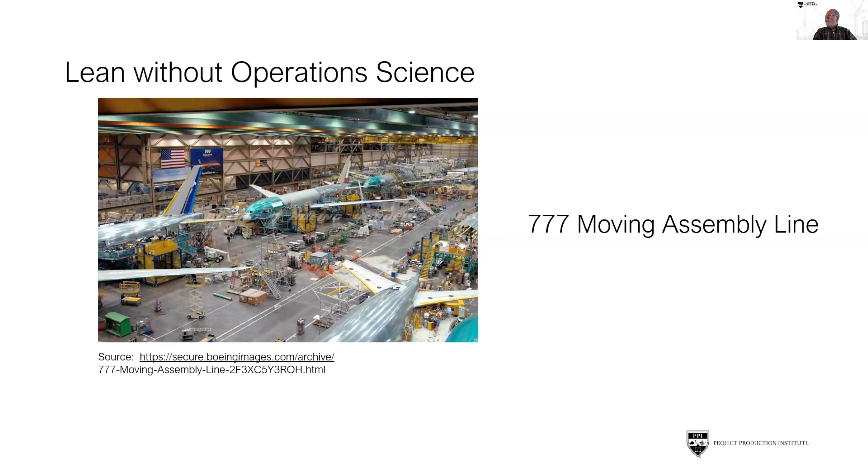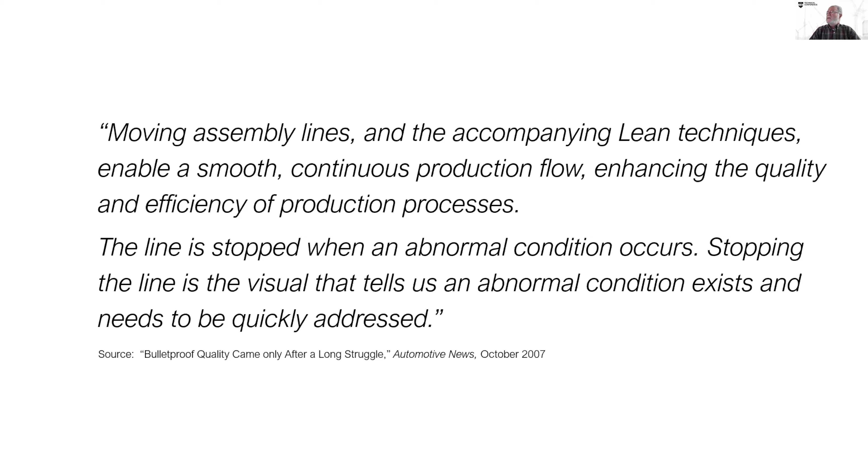Almost 15 years ago, I saw a talk about the 777 moving assembly line, presented by a guy from Boeing. That got us very interested. The reason you have moving assembly lines is that when the line is stopped, there's some abnormal condition. Stopping the line is a visual signal that tells you something is going on and you need to address it quickly. The only problem with the Boeing moving assembly line is it moved inches per hour, not very fast, so no one really noticed, but that was okay. They still wanted to implement a moving assembly line because that's what their Japanese lean consultants told them they needed to do. So they did it. In 2006, 2007, they spent $250 million on changes to the plant.

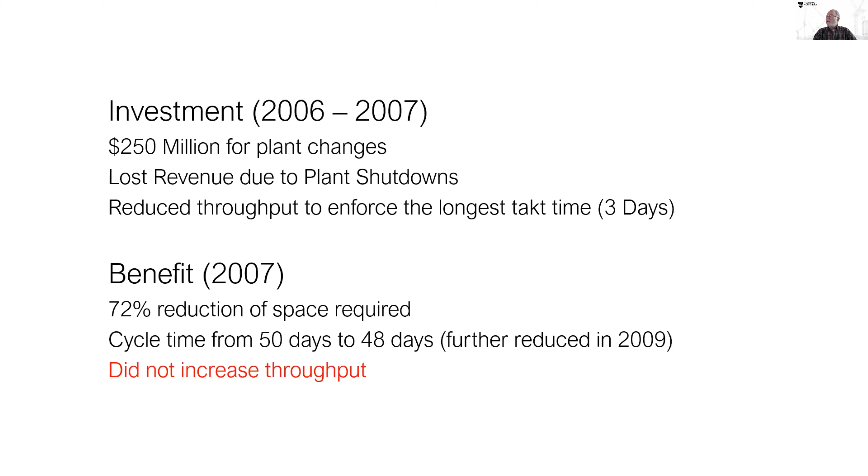They lost revenue due to the plant shutdowns, and they reduced throughput to enforce the longest takt time, because not all planes are the same. The more complex planes, especially the ones with fancier seats, take longer. So their takt time was 3 days, one plane every 3 days, and that's what it started out with. By 2007, they reduced space by 72%. They reduced cycle time slightly, then reduced it further, but they did not change the takt time, so they didn't really increase throughput. And throughput was the real issue, because customers of 777s aren't placing their orders 2 weeks before they need it, they place it years before. So if the backlog has grown too long, they may not place the order with Boeing—they may go somewhere else, maybe France, for instance.

So more recently, by 2020, 2022, the 777 was no longer built on a moving assembly line, but had a stationary assembly. The question is, they did get some improvement after implementing the moving assembly line—decreased takt time, increased throughput—but it had nothing to do with the moving assembly line itself. It was pre-wiring of harnesses and developing new technology for drilling holes in fuselages that really drove it, and that had nothing to do with the moving assembly line. So the point is, copying another company, which is different from you, may not be the best way to implement lean. And of course, we think the best way to implement lean is to use operations science.

So we're going to talk about how lean works, first according to the lean gurus: Muda, Mura, and Muri—3 Japanese words that start with M. Muda is any activity that consumes resources but doesn't provide value to the customer. It's also known as waste. And there are all kinds of muda.

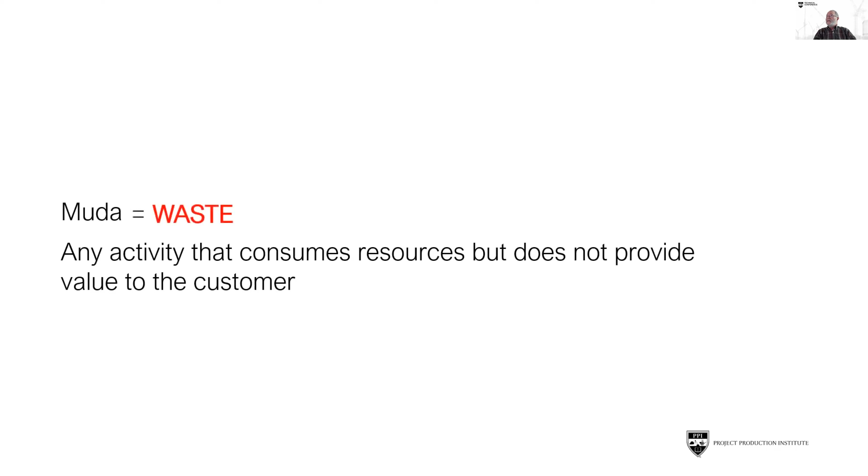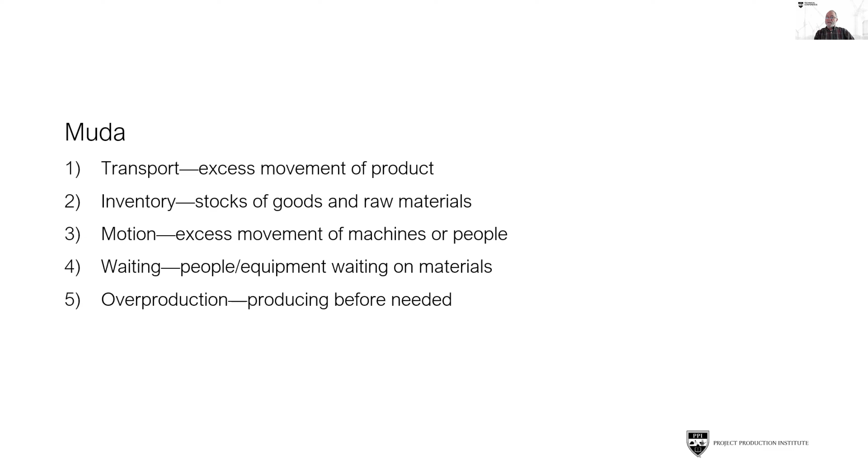There's transport, any excess movement of the product that isn't required by the customer; inventory, any stocks of goods or raw materials; any excess motion of machines, people, or equipment; waiting on materials; overproduction, producing before it's needed; overprocessing, doing more than customer expectations; and defects.

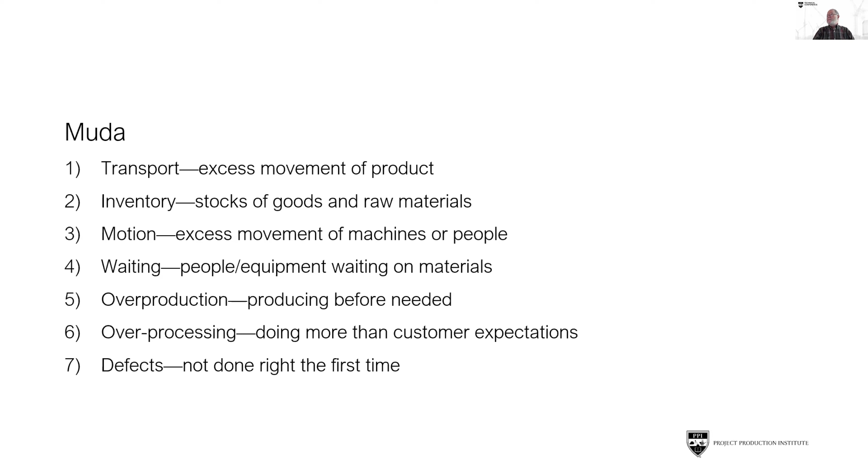Now, these are the 7 forms of muda as put forward by Taiichi Ohno in his book, The Toyota Production System. Since then, other people have added more, 8, and I think Boeing had 10, but we're going to use the 7 that Ohno created. And here's a picture of transport, inventory, motion, overproduction.

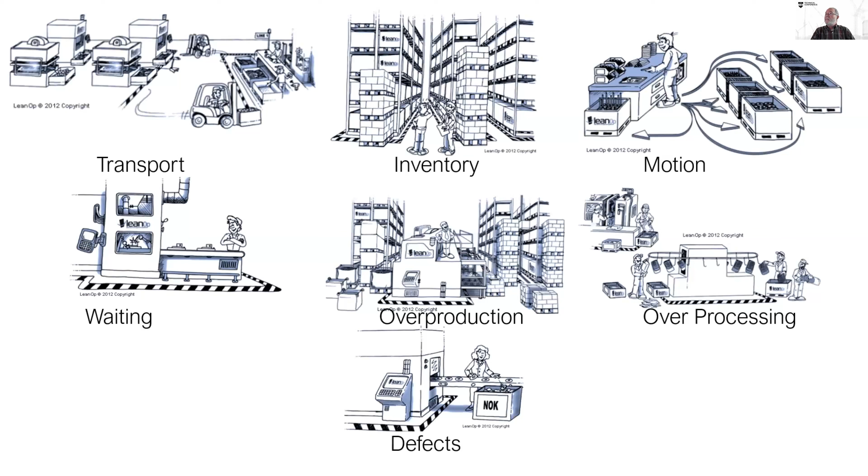Mura is unevenness in an operation, irregularity or non-uniformity. Mura is the reason for the existence of the 7 wastes. It drives and leads to the muda.

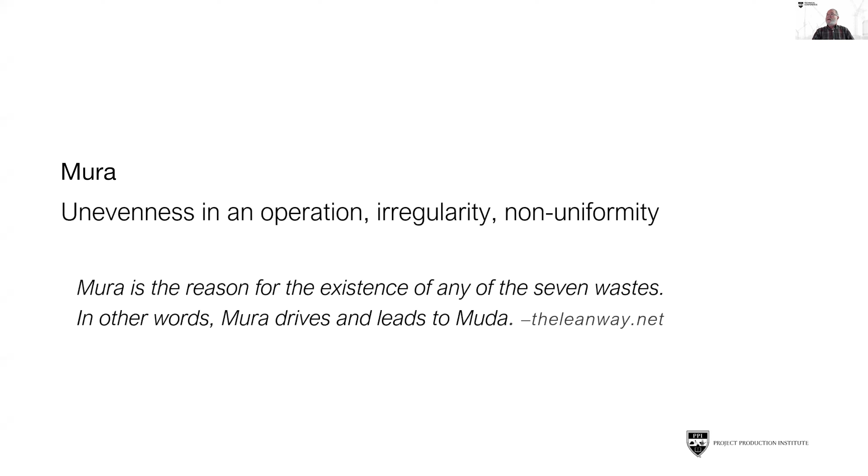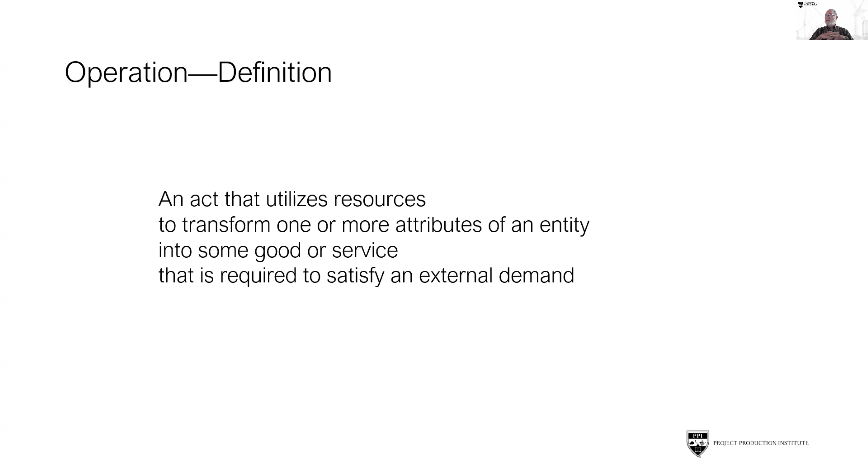And then we're going to go through a quick review of operation science. So first, what is an operation? An operation is an act that utilizes resources to transform one or more attributes of an entity into some good or service that satisfies some external demand. So the key thing is it requires resources, there's some kind of transformation, and there's some kind of demand. And so those 3 things become critical in understanding how basic operations work: resources, transformation, and demand.

So demand is the desire of some 'customer' for an entity or set of entities with particular attributes. So the customer could be individuals outside the organization, or it could be the machine downstream.

So it can be physical, the entities can be physical entities like in production, or it can be information or services. This operation science works for both manufacturing, for projects, and for services. So it's just as applicable in hotels and hospitals as it is in a manufacturing plant.

So demand is always satisfied by some process, and a process is usually one or more resources performing the transformation.

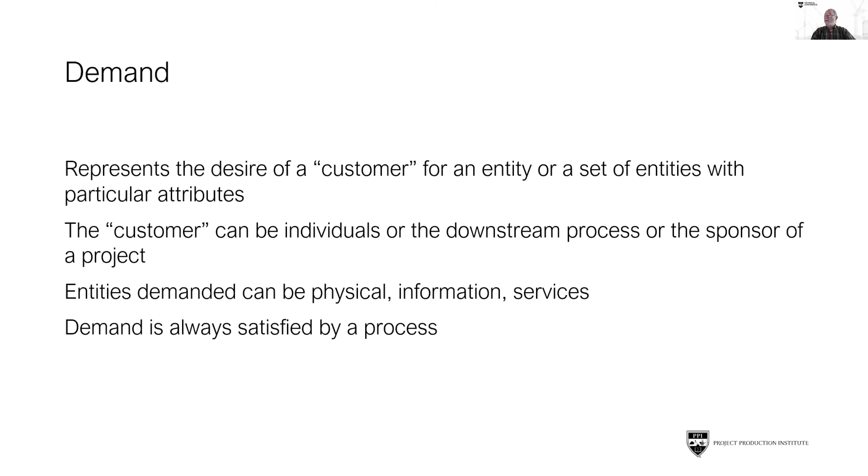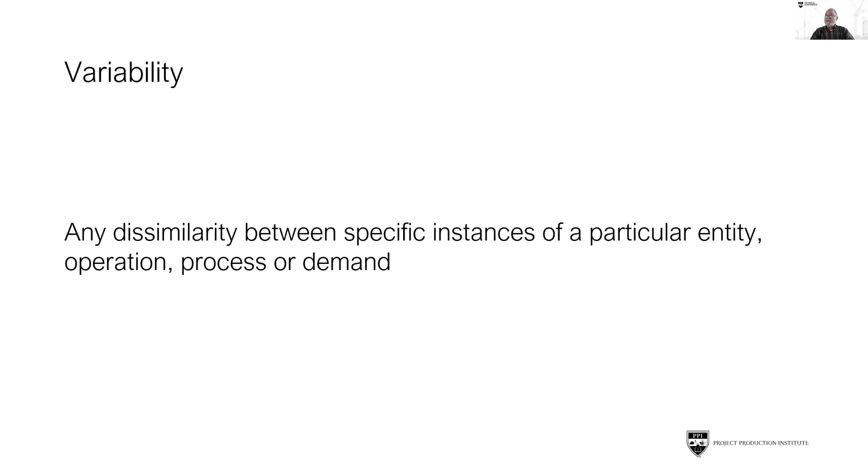Variability is a key big thing, and some other speakers have already talked about it. Any dissimilarity between specific instances of a particular entity, the operation, process, or demand. So you can have variability in demand, you can have variability in the process, you can have variability in the entities. We're going to mostly talk about variability in demand and time variability in the processes.

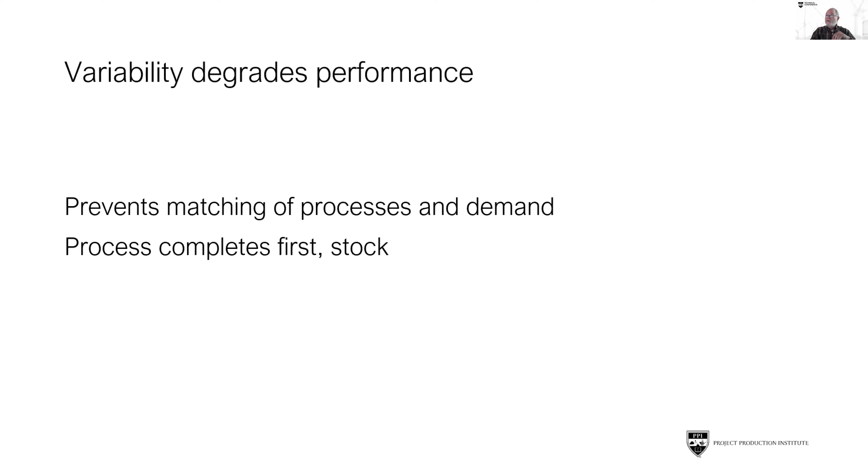Variability always degrades performance. This was one of the laws of factory physics. It prevents the matching of the processes and demand. So you can think of transformation and demand, or processes and demand, as never perfectly matching up. If the process completes first, you have stock. If the demand occurs first, you have a back order or lost demand.

So for a service system, the demand always comes first because you don't know what the service is going to be. An ambulance can't say, well, we've already met that, we've already done that emergency, and we stocked it, and here it is off the shelf. You can't stock a service, so it's always back ordered. And then sometimes, not in the services case obviously, but for production, if you don't have it in stock, it could be lost demand.

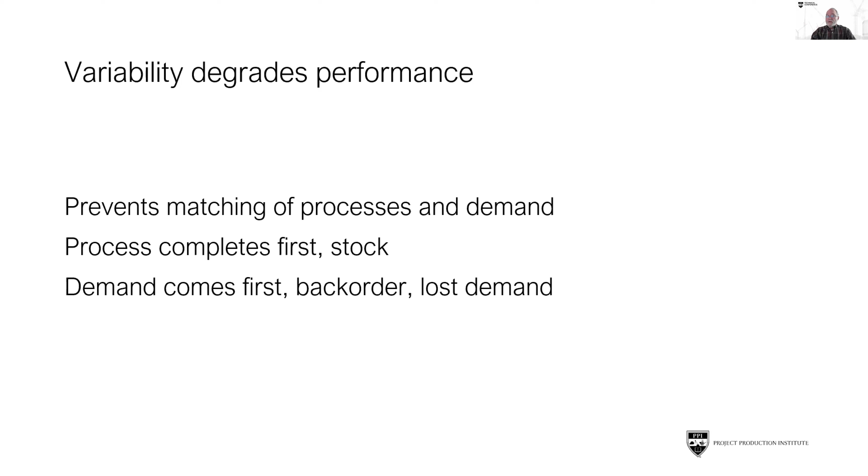So how do we buffer this variability? Anytime we have demand and transformation, or demand and a process, there's going to be some buffer in between the two. And that buffer is either an inventory buffer, the transformation before demand, or a time buffer, the demand before the transformation, or a capacity buffer, where we have more capacity than demand. And you may say, well, why would we want more capacity than demand requires? We'll get to that.

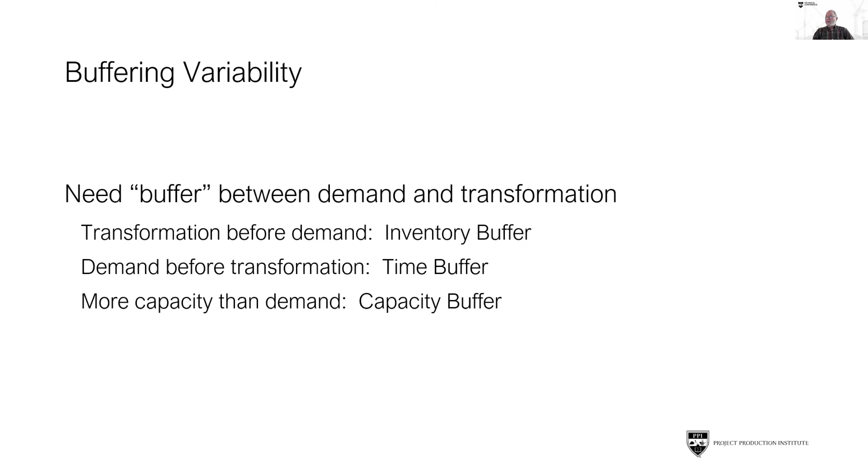So if you increase the inventory buffer, you reduce the time buffer, because there's less backorder time. If you increase the time buffer, you reduce the inventory buffer. You make everything make to order, you don't have to have any finished goods inventory. So in that case, those two buffers, the time buffer and the inventory buffer, are kind of mirrors of each other. And so we're going to call it the time-inventory buffer, as just a single buffer.

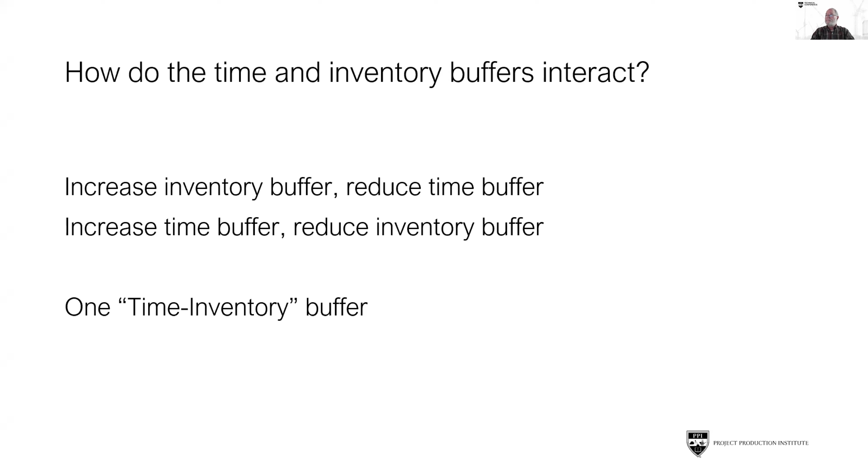The time inventory buffer is related to the variation in net inventory. Net inventory can be positive or negative. If it's positive, it's on-hand inventory. If it's negative, it's back orders.

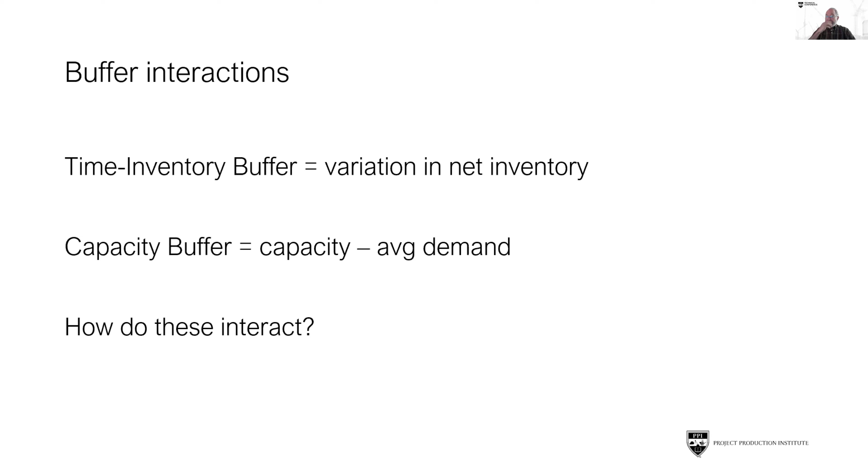And then we have a capacity buffer. The capacity buffer is basically the installed capacity minus the average demand. So what we want to do is see how these two interact, and I'm going to show a little simulation. What we have here is a situation where demand is between 1 and 10 with an average of 5.

We put in 9 units of capacity. You can see where the line is up here. And the red squiggles are the actual production, trying to keep the net inventory at 0. So if my net inventory started at 3, and I know my average demand is 5, then I'm just going to produce 2, and that'll take me back to 0. If my net inventory is -3, then I'm going to produce 8, and that should take me back to 0. And so this is what you get.

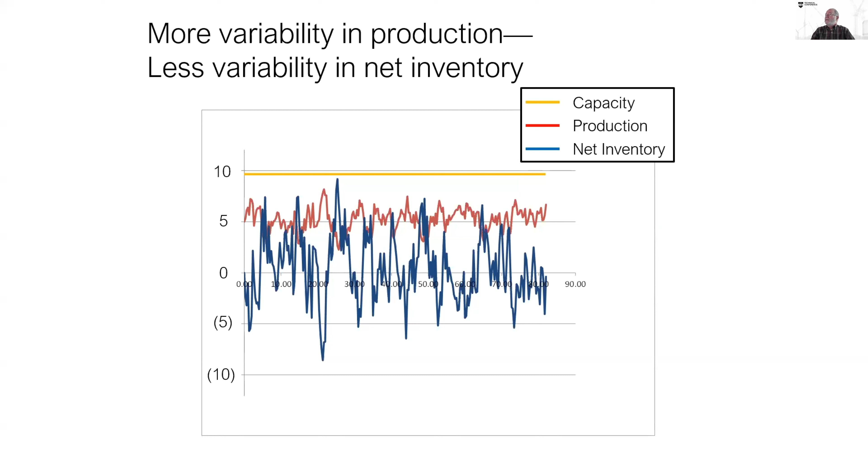When you have plenty of capacity, then the net inventory is here. Here's the target. Here's the capacity buffer. Here's the inventory buffer. And here's the time buffer. So we just made these buffers, from the baseline to the maximum.

So the question is, what happens when we decrease this capacity buffer? Because if we have 9 installed and the average is 5, that's a 55% utilization. That's a 45% capacity buffer. That's a lot of wasted capacity. 45% of the time people are doing nothing.

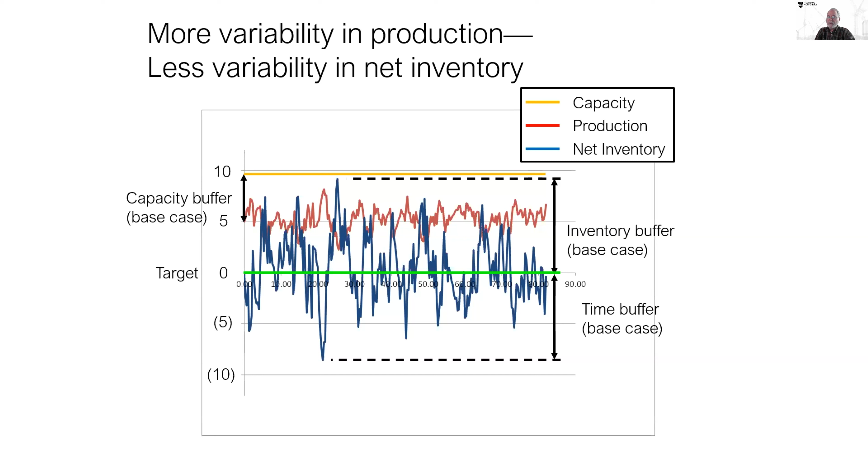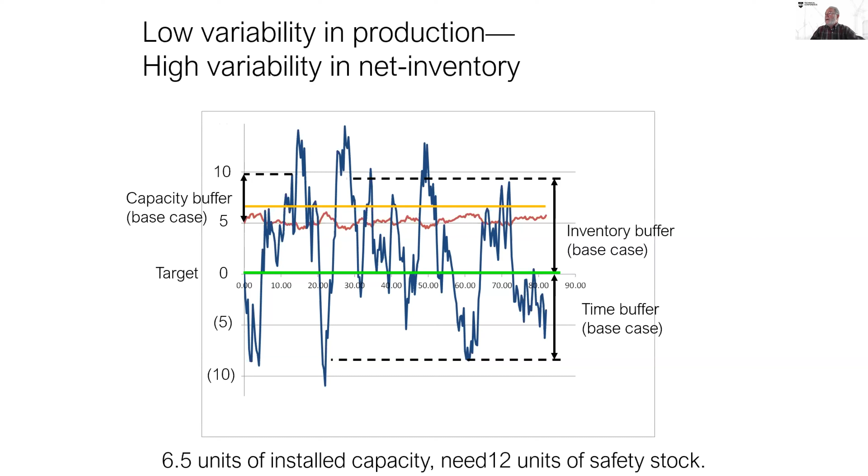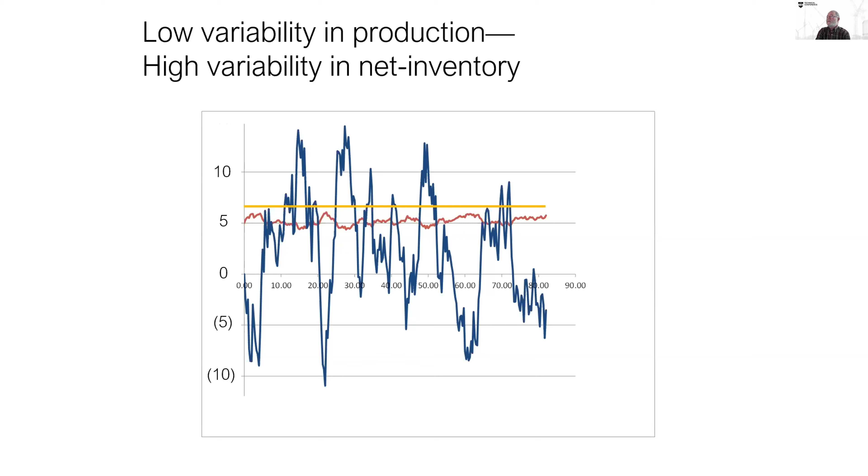So here's what happens: both the inventory buffer and the time buffer increase. There's the old inventory buffer, there's the old time buffer, and they both increase when we decrease the capacity buffer. So as we squeeze down from here to here, we see the red squiggles get smaller, but the blue squiggles get bigger, both positive and negative.

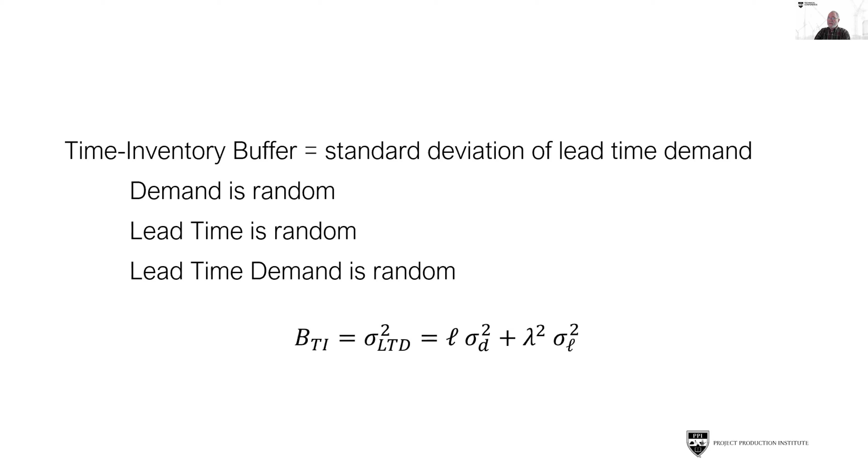This time inventory buffer we found is the standard deviation of the lead time demand. Demand is random, lead time is random, lead time demand is random. Here's the formula for it. It's given in Factory Physics, and we won't get into that. So there's a visual of the standard deviation of lead time demand. It's not between the maxes, it's what the standard deviation is. You can kind of see what that would be.

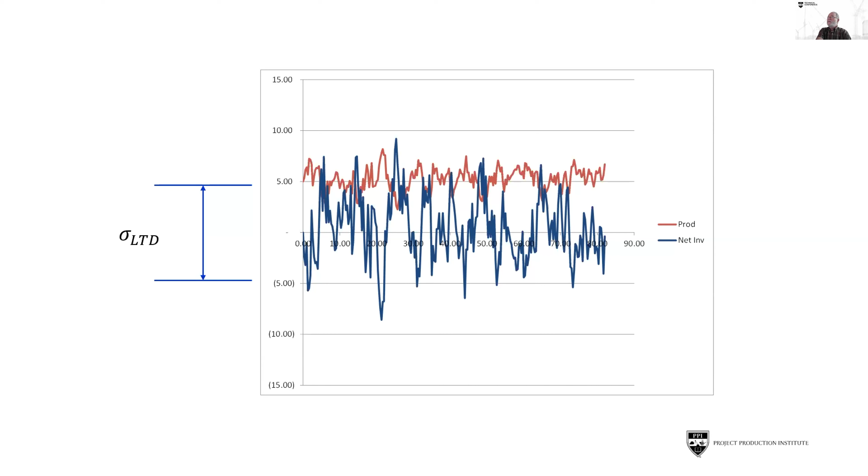What we found is that at most production rates, the capacity buffer times this standard deviation of lead time demand, or the time inventory buffer, is approximately equal to the average variability, both the variability in demand and variability in production. And this is a new result that people haven't seen.

So here's an example. Demand's down there at the red line, and we have lots of capacity. So the net inventory stays pretty small. Utilization is much, much less than 100%. When we squeeze it down, this net inventory goes up, and some of that can be positive, some of it can be negative. So you can see: lots of capacity, not much net inventory; limited capacity, more net inventory.

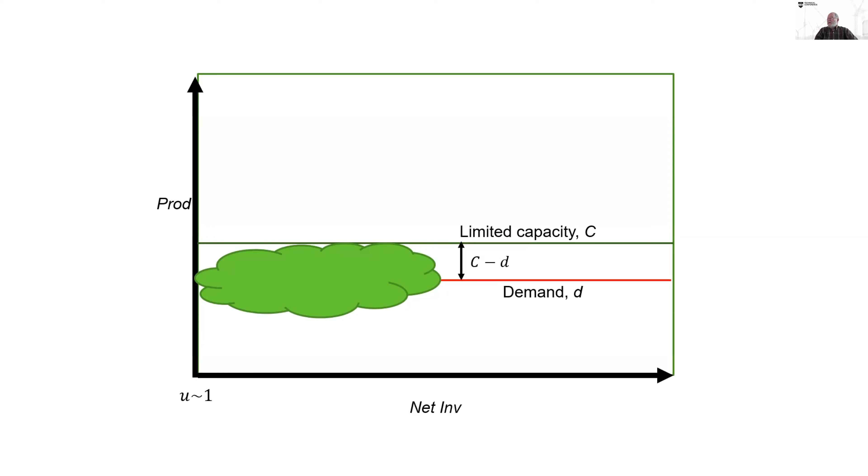So whether that net inventory is stock or whether it's waiting for replenishment or waiting for satisfaction of demand depends on where you move the target.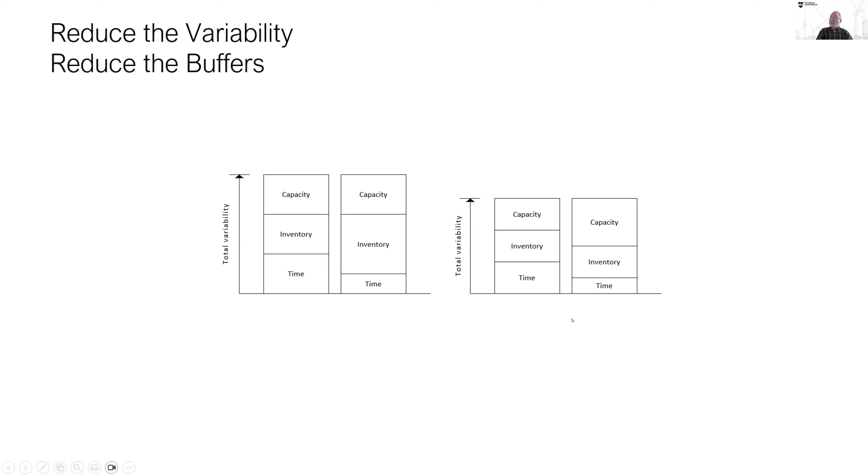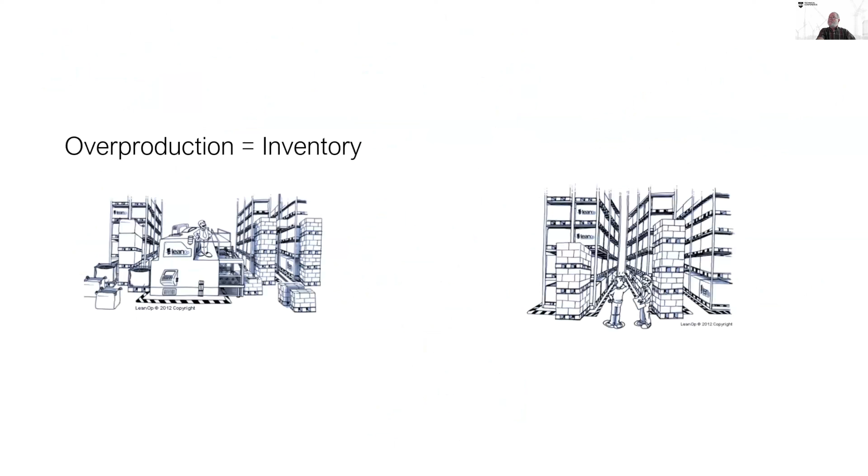So let's look at the lean ideas considering operation science. Muda - here's all the forms of Muda. Overproduction is inventory, and stocks are stocks. So really those two are the same.

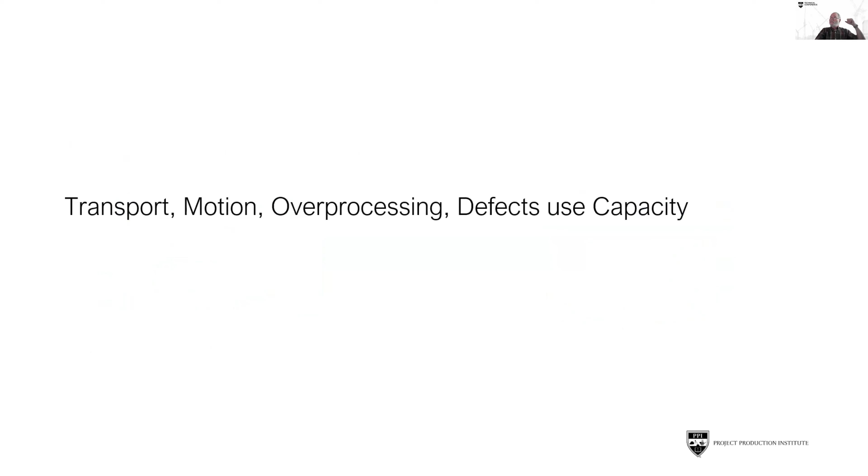Transportation, motion, overprocessing, and defects use capacity. So you can think of that as an unnecessary capacity buffer. And there we agree totally that this is waste, so eliminate it if you can.

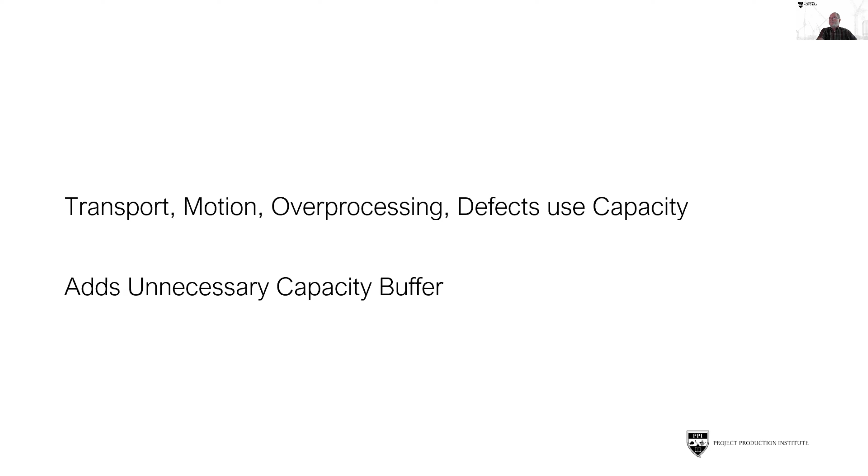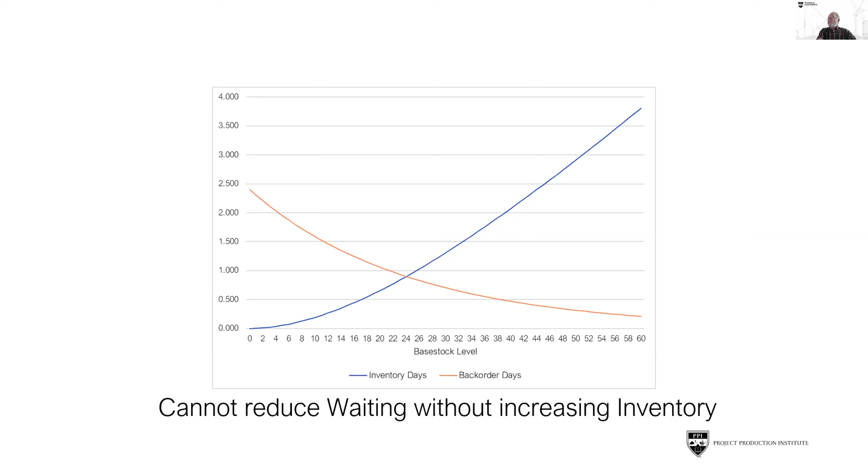So it's kind of silly to have waiting and inventory being two different forms of Muda, since the only way to reduce them both is to reduce variability. And if you can reduce variability, then you can reduce both inventory and back order days or time.

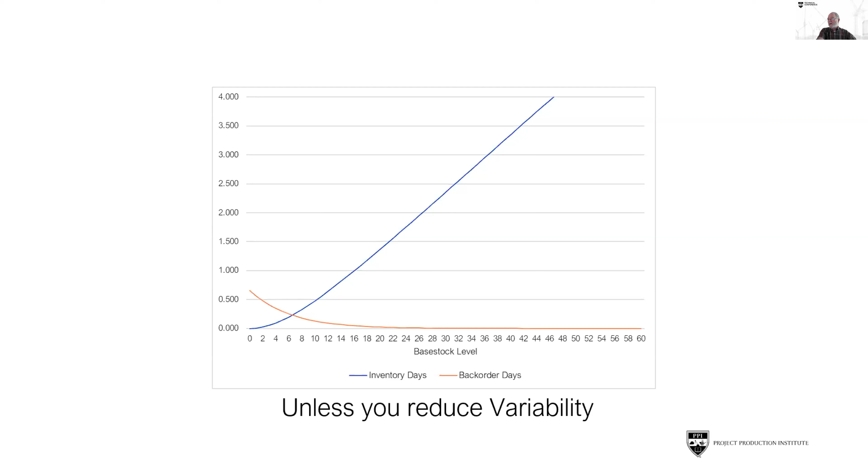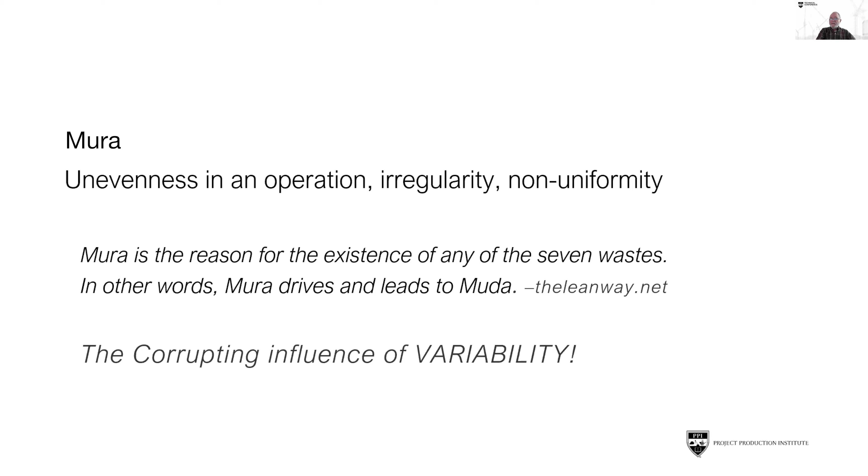And that becomes critical. Mura, unevenness in operation, irregularity, or non-uniformity. Here, Mura is getting very close to variability. We had a chapter in Factory Physics called The Corrupting Influence of Variability. The only problem with the lean description of it is it gives no quantitative way to measure it, and it doesn't show what the relationship is to the other buffers.

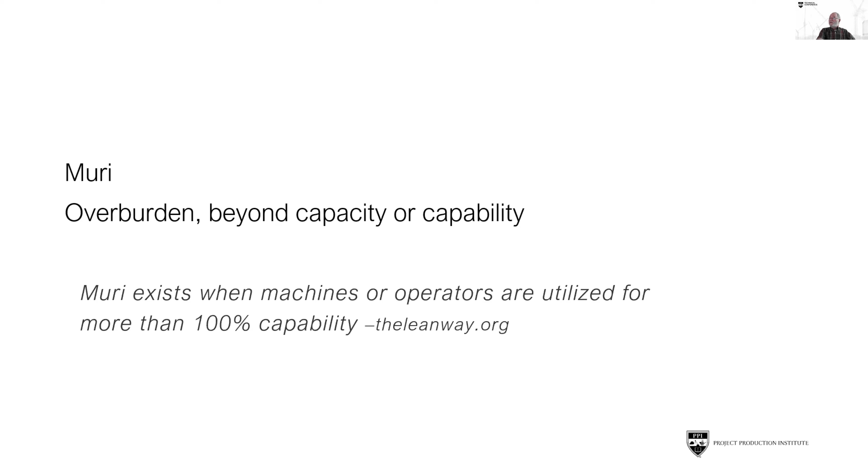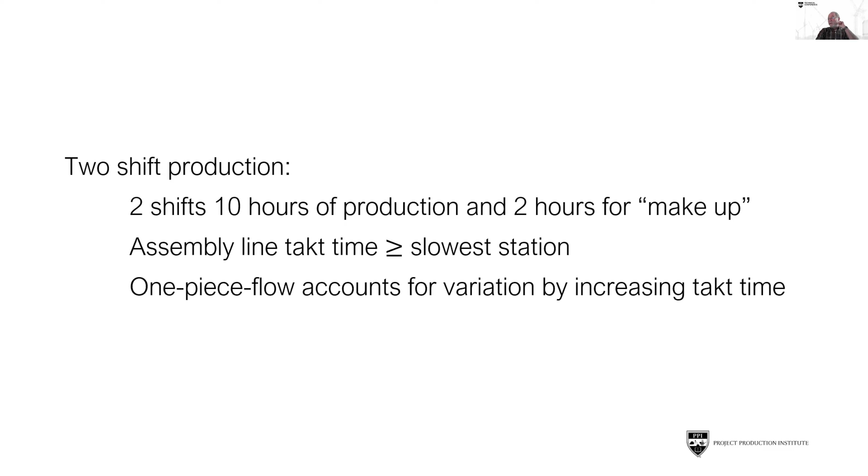Muri is overburden, which is beyond capacity or capability. It's when you're over 100%. But what we show is that you need to be much less than 100%. And Toyota has done this. Their classic Toyota production system, 2 shifts, 10 hours, with 2 hours for makeup. Assembly line takt times are greater than the slowest station. One-piece flow accounts for variation by increasing the takt time. The Toyota production system usually has a utilization of about 70 or below 70%.

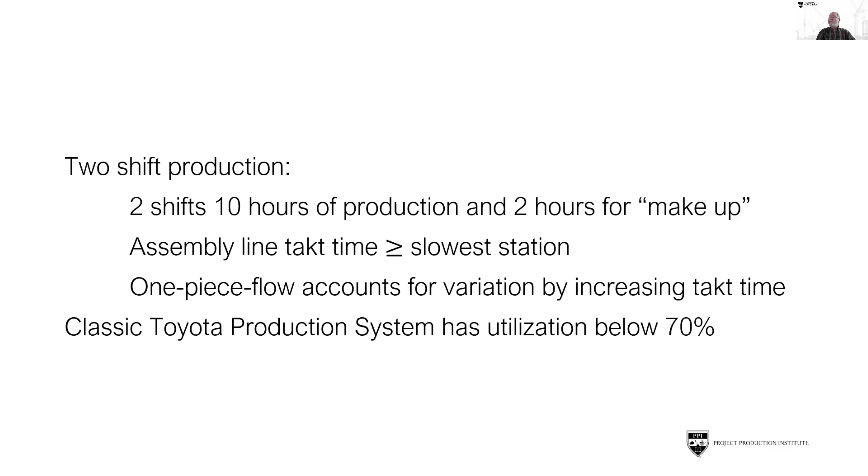So operation science design, we design with minimum total buffering cost. What we want to do is consider the cost of maintaining capacity beyond demand, carrying inventory, and stockouts or back orders. We've got to optimize all these costs.

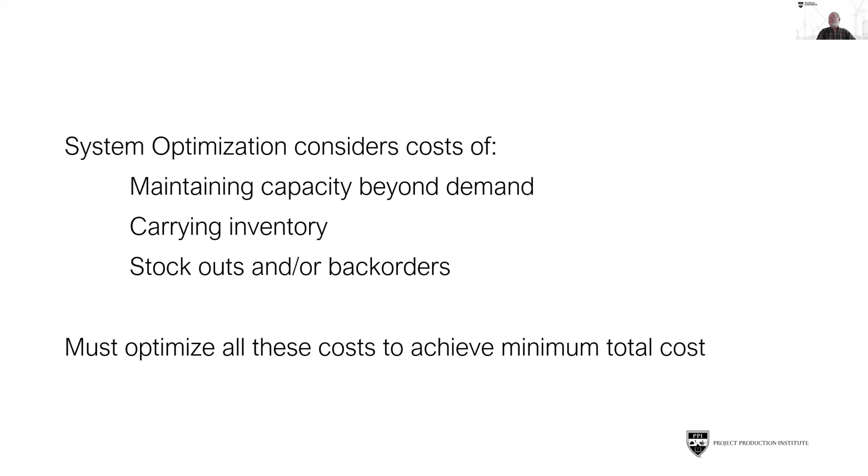So here's an example with 83% utilization. The inventory carrying cost is 1.5 million a year. The back order cost is $500,000. Extra capacity is 2 million. Total cost is about 4 million.

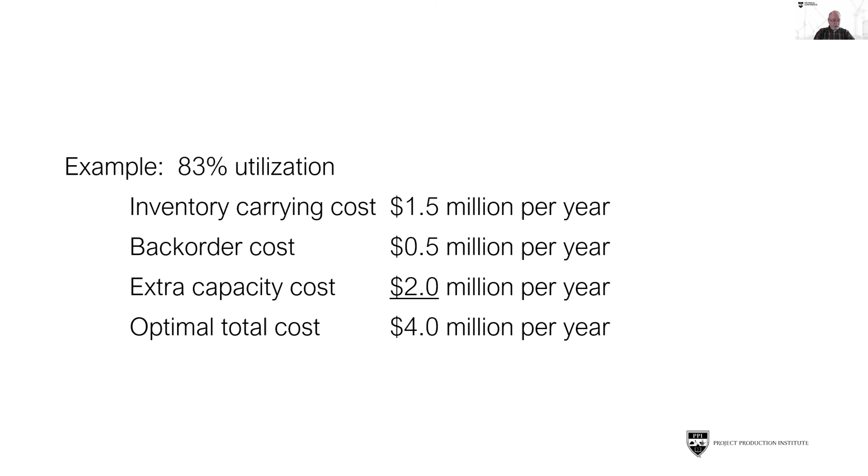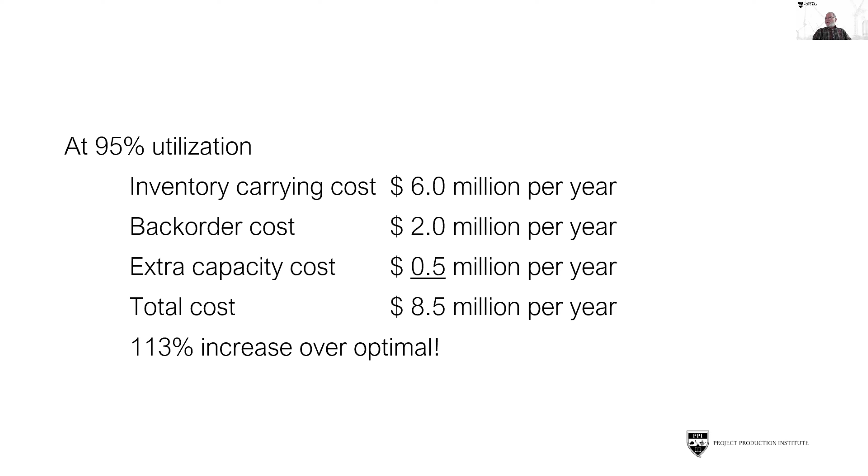Now people say that 83% is a lot higher than 70%. So Toyota kind of overcompensates on the capacity buffer. But a lot of times this is hard to get by the bean counters, and they want more like 90% or 95% utilization. If you had 95% utilization, you do get a reduction, and you go from 2 million to $500,000 in the extra capacity costs. But your inventory carrying cost to keep the back orders low goes way up. And so your total cost is a 113% increase over optimal.

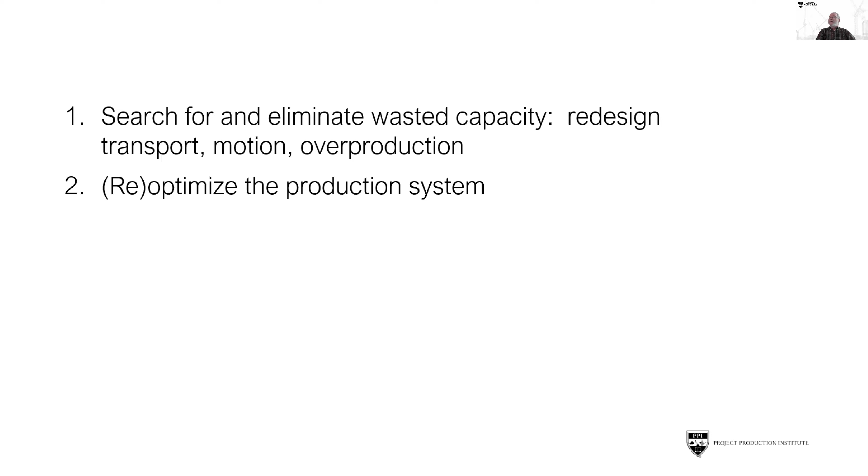And so the way you implement this is you first go search for the wasted capacity, redesign the same things that Muda mentions—the redesign transport, motion, and overproduction, and any scrap. Then reoptimize the production system. Reduce WIP to reduce cycle time, quickly discover problems, stop and fix the problems, reduces variability, increases capacity, and then you're going to repeat until you're lean with minimum buffering cost.

The big difference with operation science is that every time you change the production system, like you eliminate some problems, you need to reoptimize the production system. And that you can do with something like the production optimizer in the toolkit for PPI.

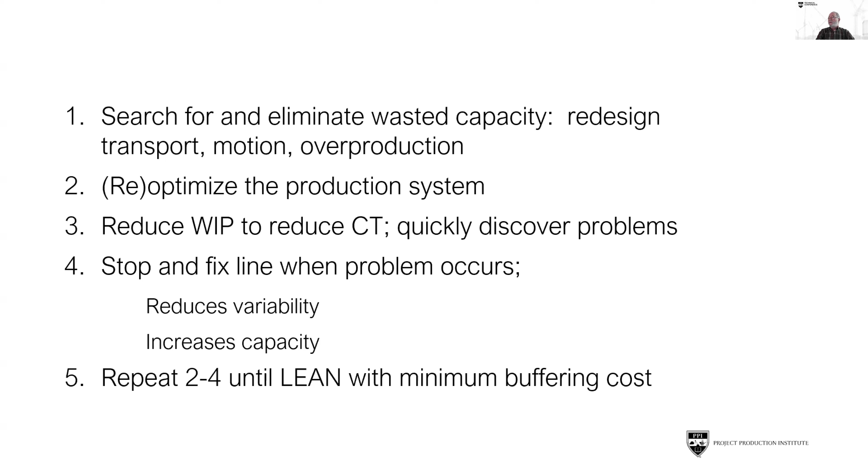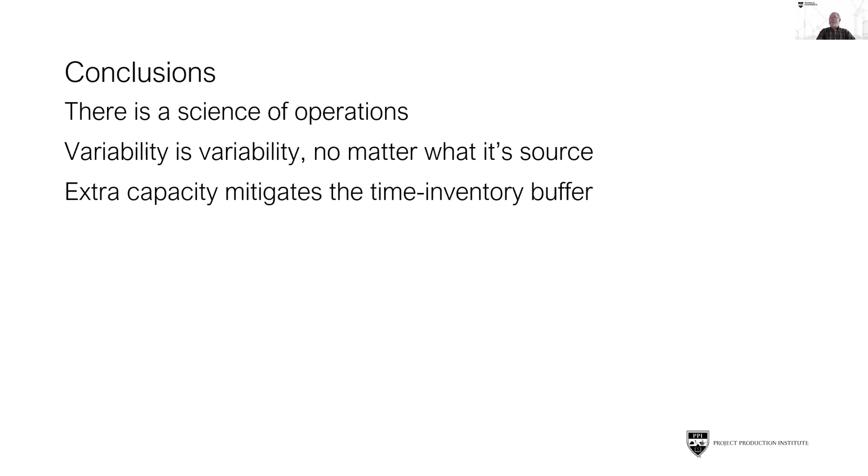So the conclusions are: there is a science of operation. Variability is variability no matter what its source. Extra capacity mitigates the time-inventory buffer. OS Lean recognizes that efficient production is usually less profitable. Lean is the process of reducing WIP to eliminate problems, and lean methods without operations science can be disastrous. Usually things get worse before they get better.

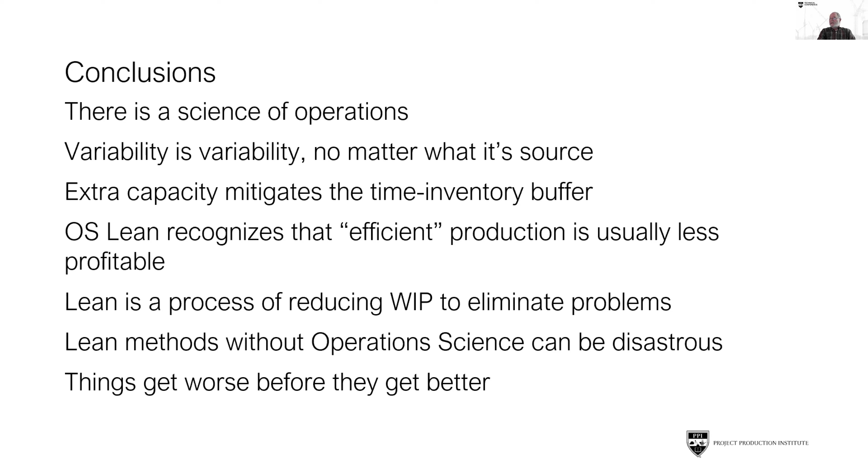So when you start reducing the WIP, the inventory buffer, then a lot of times you reduce the throughput. So are there any questions?

There we go, Mark. Thanks. If you can stop sharing so we can see your face more clearly there.

Got a question online here. Could an agreed upon takt time within a process be a quantitative measure of MURA?

Not by itself. If you know the takt time and you know the average process times, you can get the utilization, and the utilization relates to MURA. So you'd have to know what is the longest process time, or what is the longest effective process time. The takt time by itself—Toyota had takt times of 45 seconds and Boeing had takt times of 3 days. It doesn't necessarily mean Boeing is worse. It just depends on what is the capability of the line, what they're doing. Yeah, of course.

So the idea that utilization of capacity should be around 70%, even in that vicinity, even 85%, is so contrary to the way project people like me think. In fact, we use 95%.